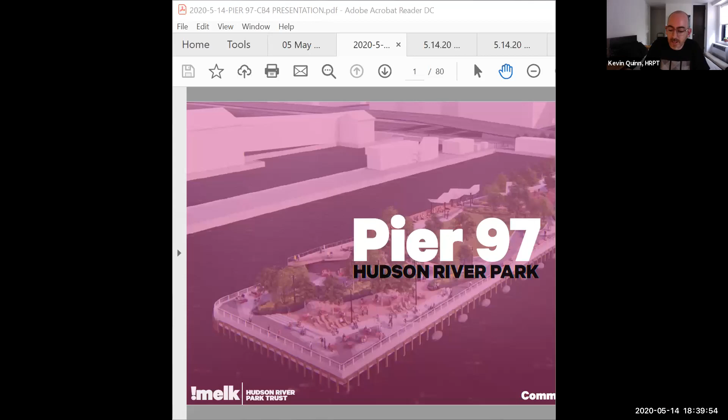When we were last together on this project in November, we presented a schematic level design. Since then, we've been to the Public Design Commission, who received it positively but gave us some minor comments that made the project a little better. We've added Toshiko Mori Architects to the team to develop the building component, and we've also got new information regarding the historic ship location. So we'll begin by having Melk, our design prime, go over the changes we've made to the landscape area in response to the Public Design Commission comments. Ian, if you could start your bit.

Hello everyone, nice to see you all again. Hope everyone is well. Last time we met with you was back in November, and today we're going to do a brief recap of the project for the benefit of some of you.

Just to give some context again of where this project is, this is more for the benefit of the public tuning in now. This project is in the northernmost extent of the Hudson River Park, nestled between Clinton Cove and the southern side of Riverside Park South, pretty much in alignment with West 57th Street.

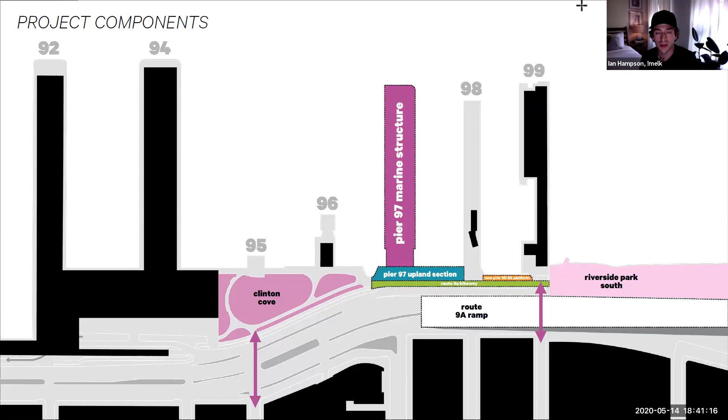It's also proximate to Central Park, a 15 minute walk uphill, and it's near other community amenities such as DeWitt Clinton Park, Gertrude Ederle Recreation Center, and Lincoln Center.

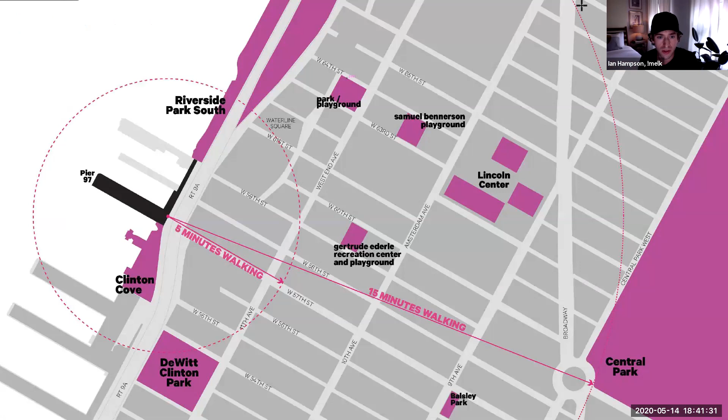This is the running tally of the public engagement we've done with the community to date. May 14th is today, so we've had a good amount of time spent with the community, and we feel like we know all of you well. So far everybody's received this project with open arms, and we're thrilled about that.

Just to give a recap of the schematic design that you saw last time when we were together in November.

This was, and still is, the most recent design scheme. You can see Pier 97 highlighted at the bottom, Piers 98 and 99 to the north. The actual project boundary includes the frontages in front of Pier 98 and 99 - Pier 98 being Con Edison and Pier 99 being DSNY, the Department of Sanitation. We're doing improvements along that corridor as well.

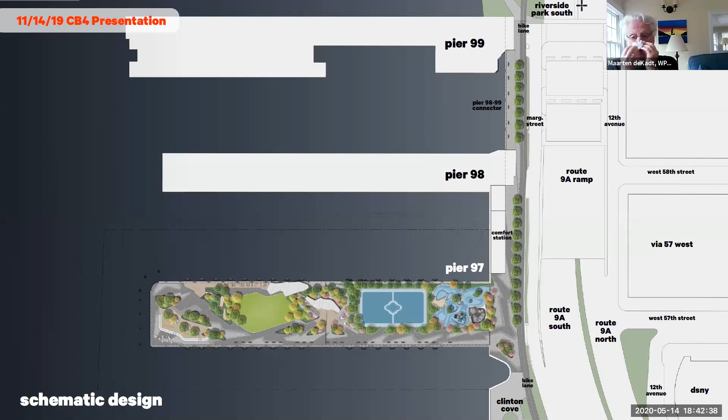Zooming in here, going from east to west - which on this picture means right to left - we have an entry plaza, a playscape for children, an activity field sized for U7 activities, a flexible gathering area, sun lawn, sunset deck, a belvedere, and an overlook. Programmatically, the park is designed to have all the sports and activity program justified to the east, with more of the park and immersive program to the west.

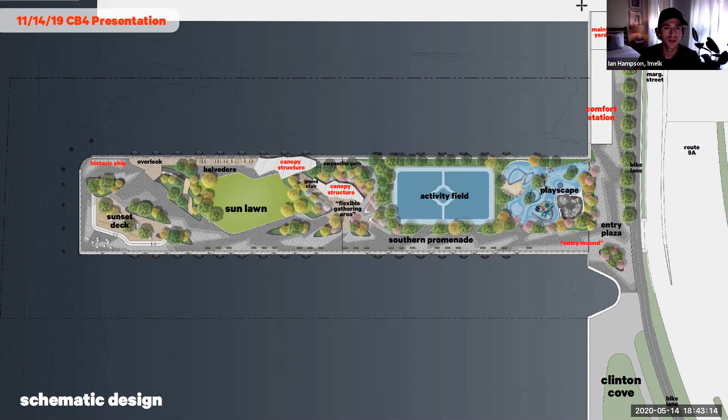This is a bird's eye view looking towards the northeast from the Hudson River, where you can see all the topographic manipulation we've introduced in the design.

This is showing the entry to the children's playscape from the upland. If you're walking south from Pier 98 towards the entrance of Pier 97, this will be one of the possible entrances you could take, if you have children for instance.

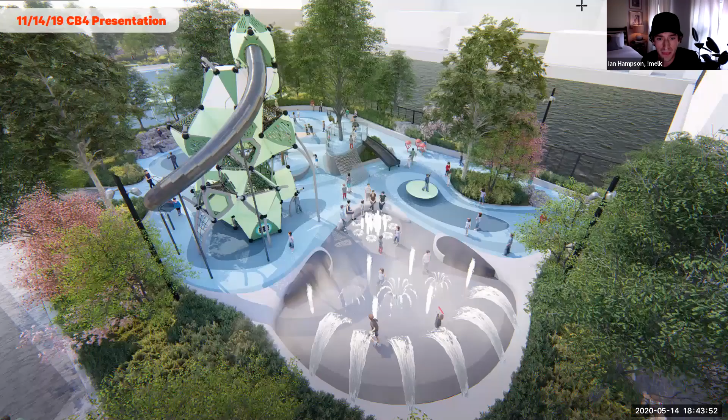This is a bird's eye view of that playscape, showing in the foreground a splash pad and water feature for children - young children, toddlers, and older children.

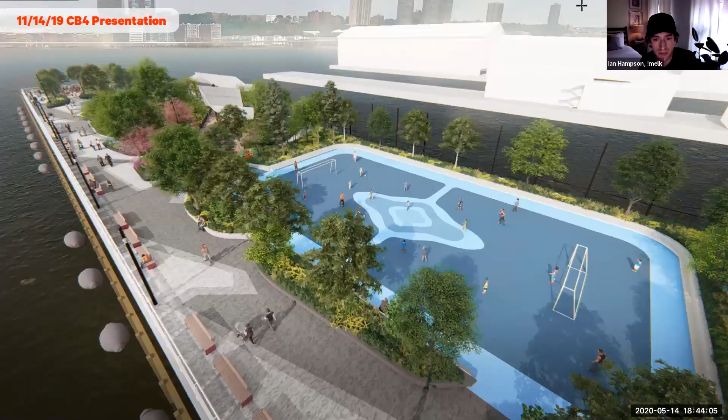This is another bird's eye view as we start to walk west, showing the activity field sized for U7.

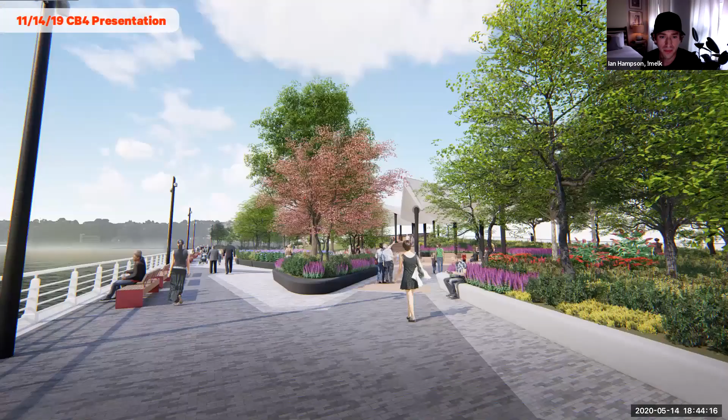Ian, can I interrupt you for one second on that? Is that color scheme what you're going to be using - is it going to be a blue field? Blue field, yes. Thank you.

Some of you may remember, this is what we presented last time as the choice we offer the public - whether you decide to go directly west towards the end of the pier, or go right and find yourself in a more immersive botanical zone that's shady, with lots of visual interest and places to sit and read in quiet.

If you move into that more secluded zone, we call this the flexible gathering space. You'll see the canopy structures we introduced last time. You're able to either continue your journey to the left, or go walk up the stairs to the Belvedere.

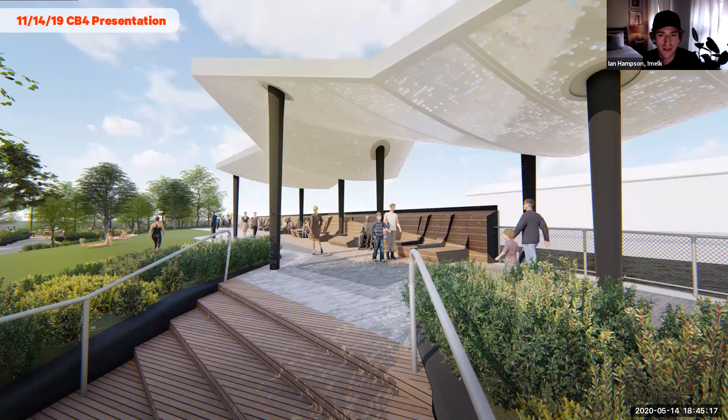This is showing one way to get up to the Belvedere - a seating area that's about 7 feet higher than the base of the stairs.

You're also able to get up to that Belvedere through a sloped walkway that goes around the back side of the flexible gathering space, and that takes you to the exact same location. So we have an intentional convergence of circulation at the top of the stair and at the top of the sloped walkway.

What you have is either a sun lawn to choose from to lay in, to relax in, or you could sit and read and sunbathe on the lounge chairs that we have designed along the northern edge there, suitable for tandem seating and groups and children and whatnot.

And then if you continue walking down towards the west, we have the overlook. The overlook is another elevated area that's about 11 feet higher than the surface down below, and this gives you a beautiful panoramic view of the Hudson River to the north, west, and south.

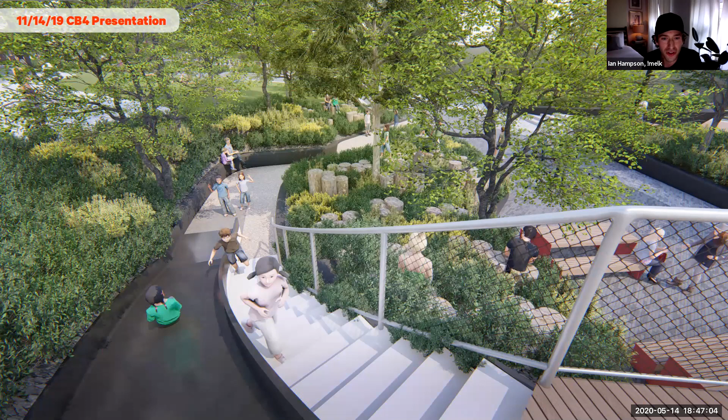If you recall, we designed an adult slide, which we imagine is going to be quite popular for children and grown-ups alike. This shows you how you could get down quickly from that 11-foot overlook down to the lower portion of the park inside this wooded zone, and you're able to come back up to the top through these stairs here if you'd like.

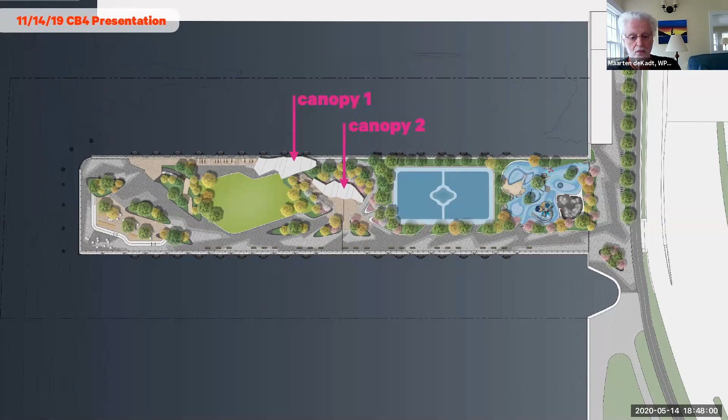So, canopy designs. Part of the reason why we're back with you today is because we've had to make an adjustment to our canopies. As we mentioned before, we were still under PDC review last time. We've since been to PDC, and they've given us some of their comments for the canopies.

And as you recall, we were showing last time a canopy design that was basically kind of an undulating, faceted form.

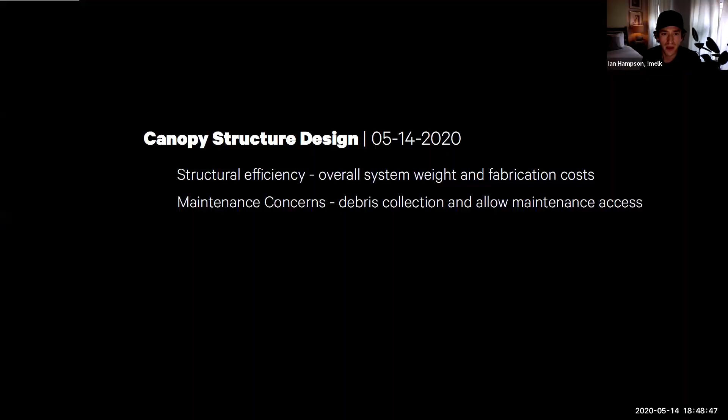Essentially what PDC came back to us with comments was really about the structure and about maintenance, so we took those considerations to heart. We developed a new structural system based on a tetrapod. This tetrapod is much more efficient.

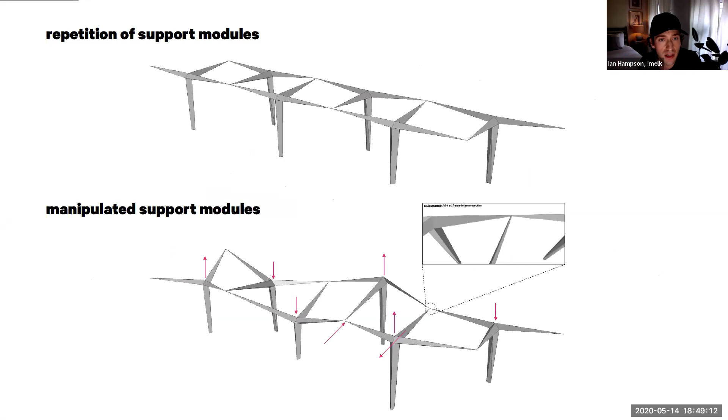What it allows us to do is, depending on what's necessary for the particular condition, whether that be creation of height or manipulation of shade, we're able to manipulate these tetrapods in order to efficiently create the desired effect. Here you can see on the top the structural supports, the tetrapods, and on the bottom, the same with the canopy on top, the skin, the perforated roof, if you'd like to think of it like that.

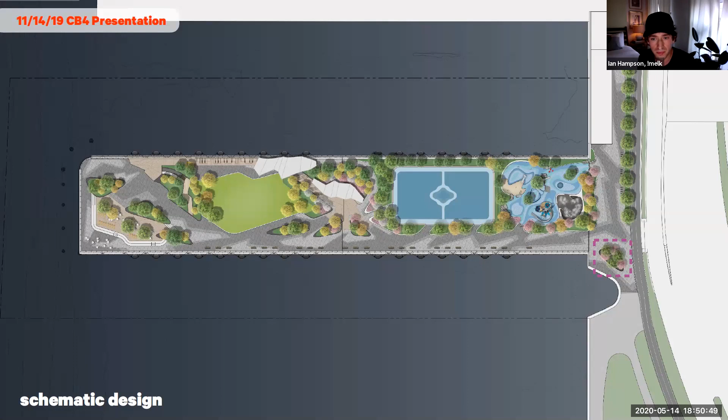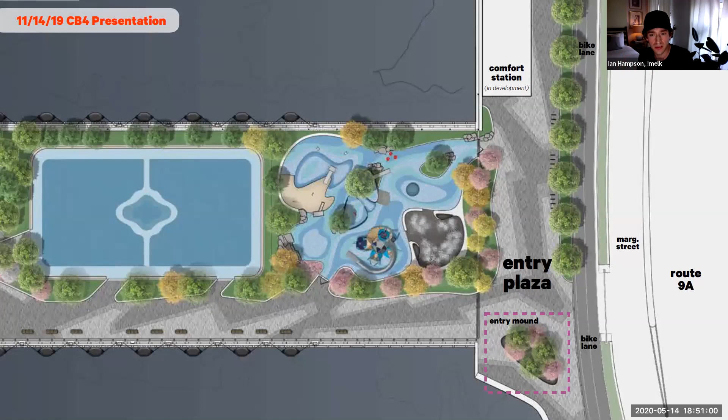If you recall, we had an idea for a sculptural entry mound that was planted. Colloquially, we called it the tree vase, and you can see why we called it the tree vase.

This was intended to anchor and be an identifiable marker as you enter the project. This also went under PDC review. They had some comments to us, and we've made some revisions.

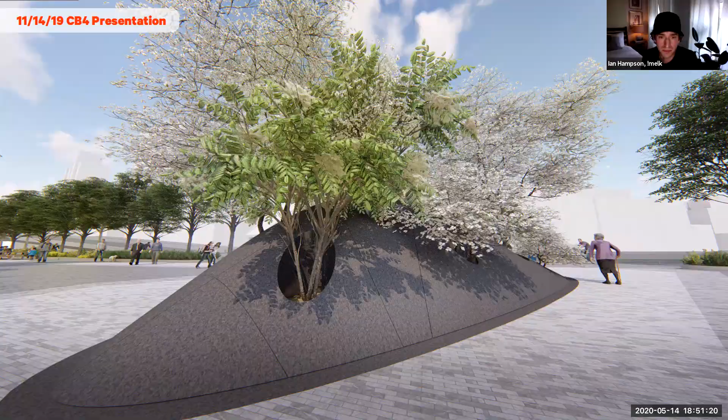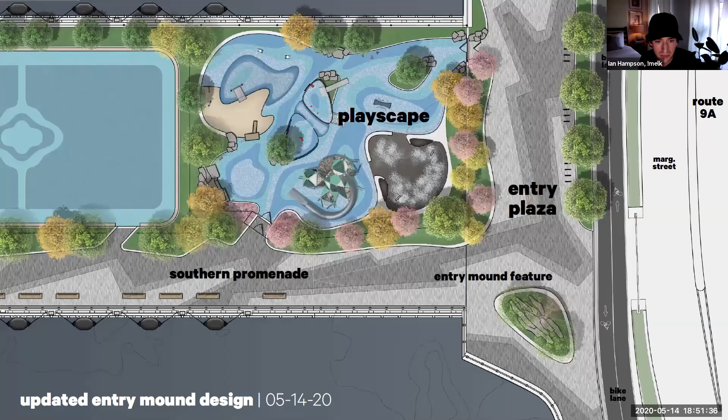Primarily related to maintenance. So we went back, spoke with HRPT, and we now have another option that still serves as an anchor, but in a different way. You can see here, this is the new configuration. It's in almost exactly the same location.

The difference now is that rather than having an arced mound, we took the vocabulary of boulders found throughout the playscape and brought them into this element, the entry mound feature. That creates continuity between these two areas, which works quite well.

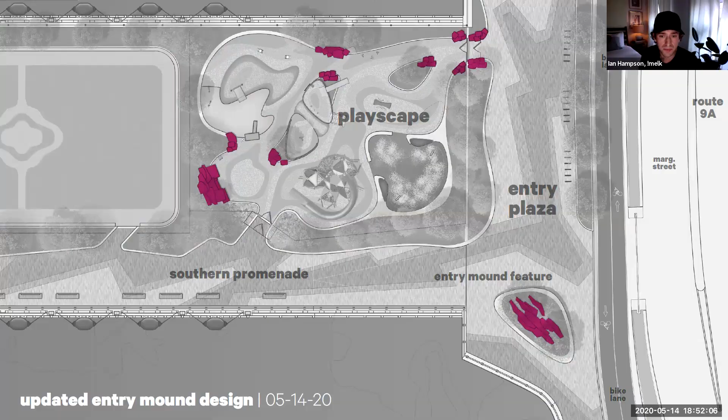In terms of components, we have the sculptural boulders that sit on the inside, surrounded by planting, low shrubs, and overstory trees. And now we even have a seat wall, so it's a place for people to sit upon entry to the park.

You can see here that it still has the same presence at the entry, although a bit different. But nevertheless, it fits within the vocabulary of the park and still suitably serves as an entrance to Pier 97.

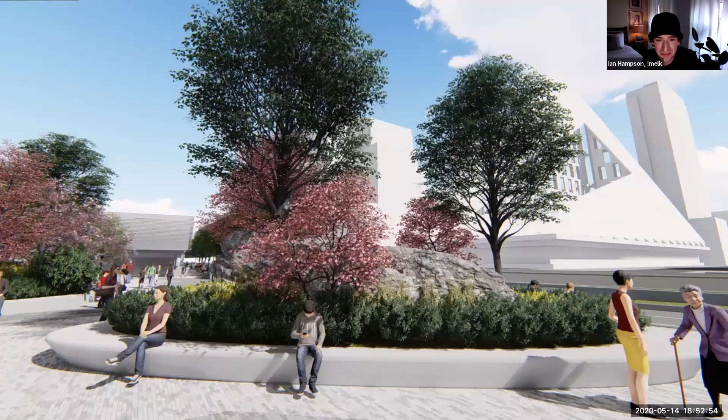Here you can see a little preview of the comfort station that you'll see next. This is looking towards the northwest, with Route 9A in the background and Via 57. And there you have it.

It's Kevin again. I just wanted to say a few words about the building before we introduce Toshiko Mori, the architect for the building. First, a quick reminder of the program: public restrooms, a walk-up concession meaning no interior seating area, a maintenance office and yard, and a utility room for the various pumps, meters, and things needed to drive the pier and the building.

One important thing I wanted the community board to be aware of is that we analyzed every square foot of this building to make sure it was really needed. For us, the open space in the park comes first, so we really struggled to make this as efficient a plan as possible. I wanted to be sure you knew that we did that.

I also wanted to let you know there are real challenges with this piece of the project. It's not an easy task to put a building here. Number one, it's in a floodplain. Number two, we want as much pedestrian flow in front of the building on the esplanade, so we have a pretty narrow, long building. And the uses of the building, like the bathroom and utility space, don't lend themselves to a lot of windows—it could be a pretty opaque building. So we were concerned about ending up with a heavy, opaque building between all the windowless rooms and the floodproofing.

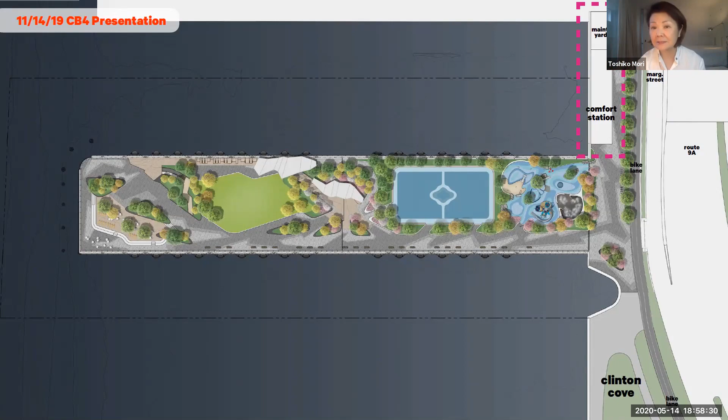The building programs include public restrooms, a walk-up cafe, a plumbing room for park infrastructure, a comfort station, a maintenance shop, a service backyard, and a field office. So it is a utilitarian building, and our challenge is to make it elegant and attractive while being incredibly functional and robust, as it's a building on a floodplain.

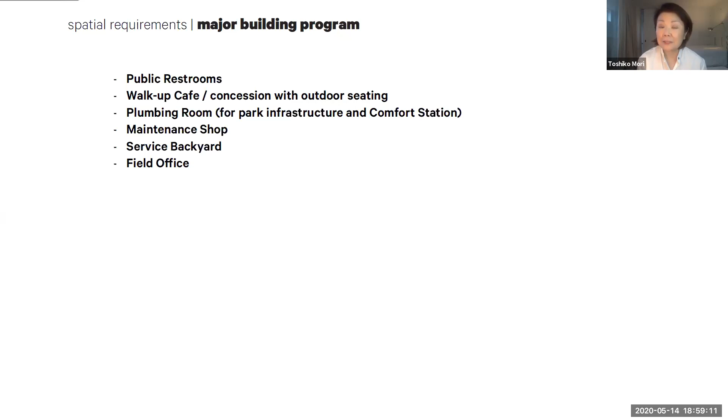David Jobart from our office, associated with our office, is the project architect. He will take you through the building in detail to show how we plan to achieve this effect.

Hi everyone, I'm David with Toshiko's office, as she mentioned. After the overview from Toshiko, I'll take us through the details of the comfort station for the next group of slides.

The facade will be wrapped with aluminum panels that have a very matte, reflective quality, allowing it to pick up different lighting conditions. As Toshiko mentioned, on a cloudy day it might be more subtle, and on a sunny day it can pick up different lighting qualities. The reflectivity is matte, so we don't anticipate any overly bright reflections.

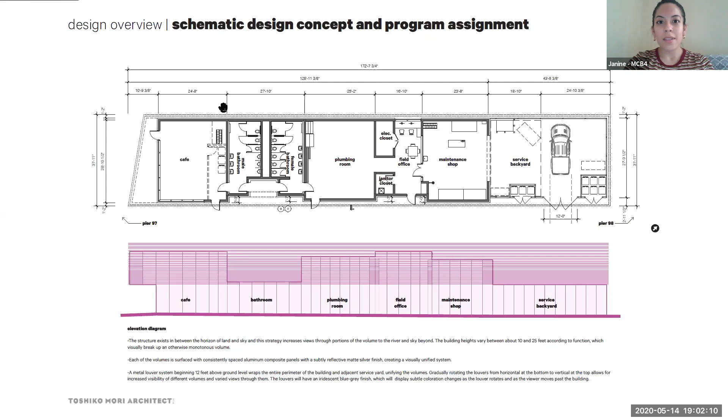If we can go to the next slide. I'm sorry, one moment. Now we're all staring at you, Janine. I know, I'm sorry, this thing froze a little bit. Give me one moment. Okay, can we see it?

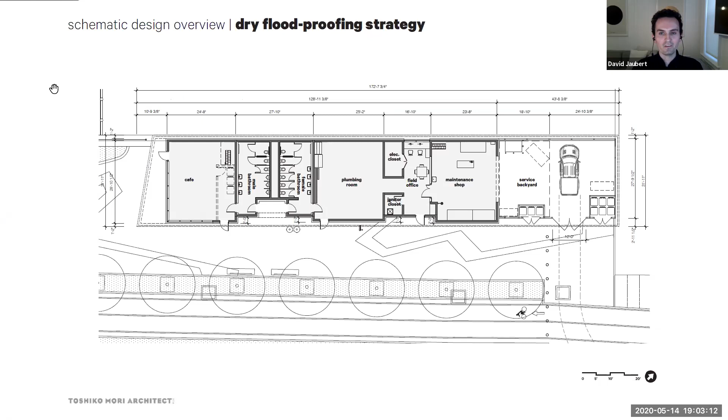Great, that's perfect. To change gears from the design overview and jump into the details—one of the more unique aspects of the project is that it's in a flood zone very close to the edge of Manhattan, on the edge in fact. As a result, the building needs to be dry flood-proofed. That's a flood-proofing strategy, meaning we keep all the water out of the building.

The way we're achieving that are these individual flood barriers, shown in green here, installed in front of each of the openings of the building - doors and windows. In order to get out of the building in the event of a flood, there's also a temporary stair stored in the building that you can use to walk over and down one of the flood barriers. They're fairly high to account for the flood elevation, which is 6 feet. That's a unique aspect of the project, and they're intended to be deployed fairly quickly when a flood is anticipated or comes on.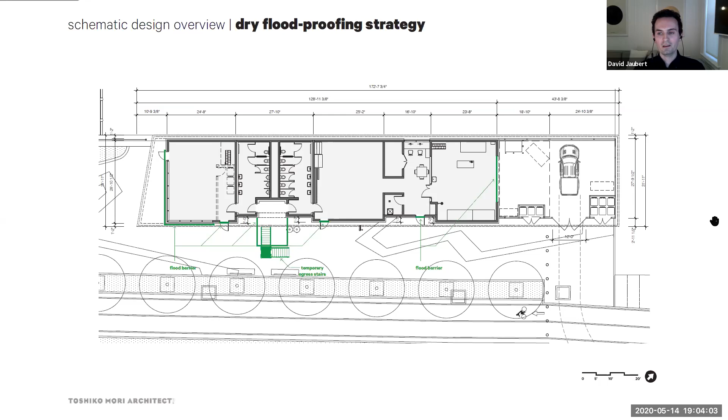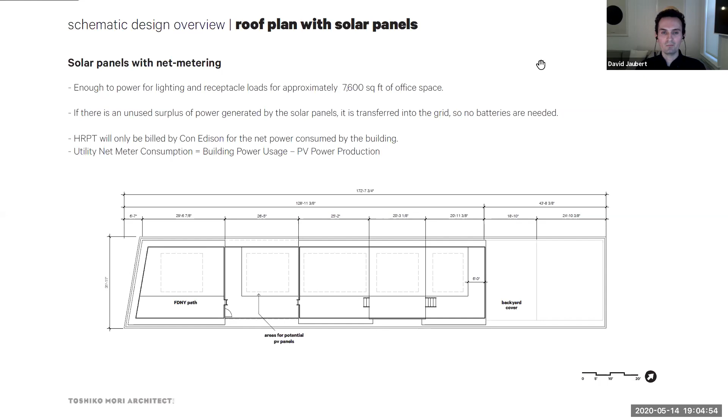One of the other aspects of the project that we're very happy about is the inclusion of solar panels installed in a net metering configuration. The panels are configured to power lighting and receptacle loads for approximately a 7,600 square foot office space. If the panels provide more power than is used, that power is funneled back to Con Ed, into the grid, and no batteries or additional equipment are needed. So HRPT is only billed by Con Ed for the net power - building usage minus PV power production.

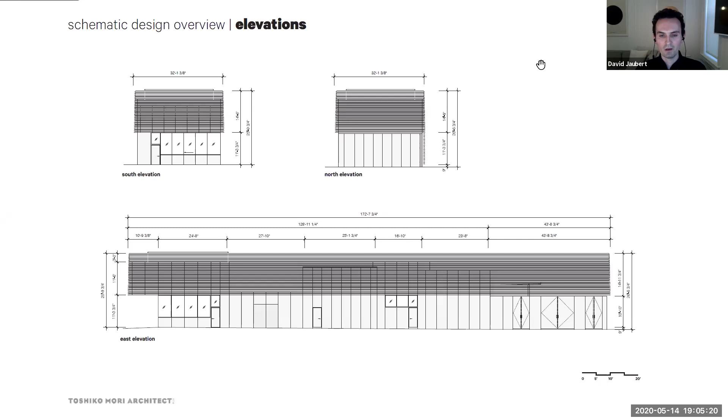Next slide, please. This is just a brief overview of the elevations of the building. The south elevation, top left, looks at a cafe on the south side of the building. The north elevation, just to the right, looks at the edge of the service yard. And the primary east elevation is what most people will see from the city, the promenade, and the drive there.

Here's a little detail about the facade panels themselves. It's an aluminum clad material - essentially aluminum composite with aluminum on two sides and a composite insulating material on the inside. It's very durable and sturdy. The panel widths are flexible, so we're able to design them in a way that wraps consistently across the different volumes of the project.

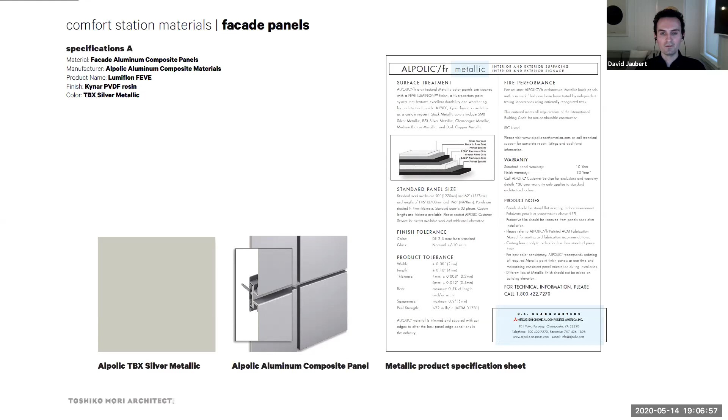Next slide, please. These are a couple of different angles looking at the materials for the aluminum composite. Similar to what Toshiko was speaking about with the building changing its appearance depending on point of view and time of day, the angle you're looking at the aluminum, due to its very metallic reflective quality, allows the building to take on some of the color of the environment as well as your point of view. Next slide, please.

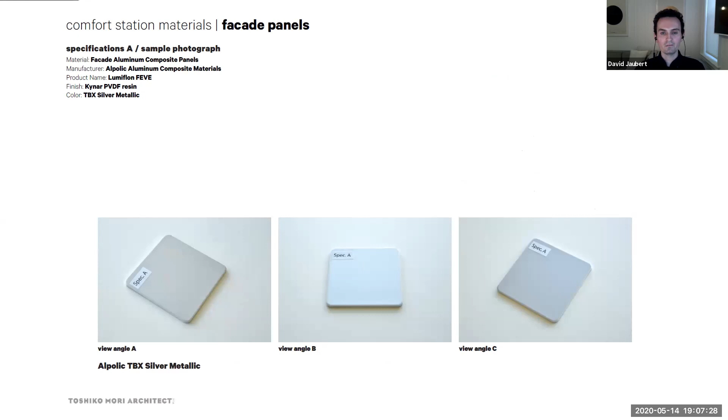This is a rough mock-up from the louver manufacturer showing a typical configuration of how they're applied to the building envelope and their rotational effects. These are all unfinished, but just looking for the basic geometric qualities. On the left, we also have a brief swatch of the iridescent color, which I think we can look at in a little more detail next. Next slide, please.

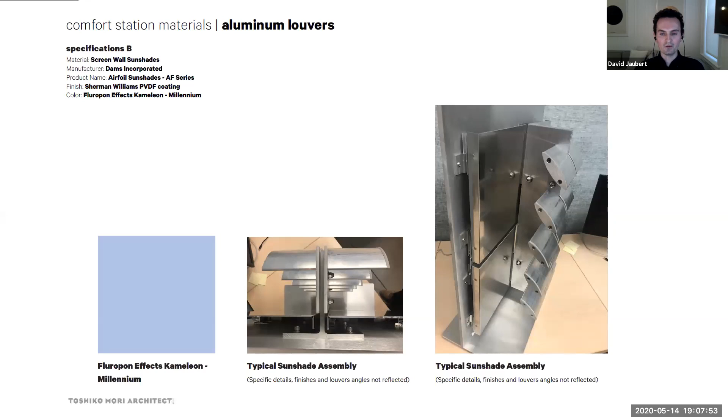Here are a couple of photographs of the iridescent material. Depending on your point of view, the material can look a little gray when you rotate it, which also happens inherently due to the rotation of the louvers and their curved surfaces. You get a very different color depending on your point of view. I think we also have a video we can pull up to show the changing effect of this iridescent material. Yeah, maybe one second.

I think the idea is to have - it has a blue tint to it, but it also has a gray, and then has a little bit of mauve. So it really works with the coloration of a sky.

It doesn't want to load on Zoom for some reason. Maybe we have to verbally explain it.

One of the reasons is the louvers are more frontal and open, so you can see into the building. They close down at an angle, which actually allows you to see through into the sky, so the color of the louvers and the color of the sky can blend at that point. The way it turns creates the illusion that you're really looking up, not frontally. We hope the louver will somehow blend into the sky and somewhat disappear, giving a very soft horizontal edge on top of the building.

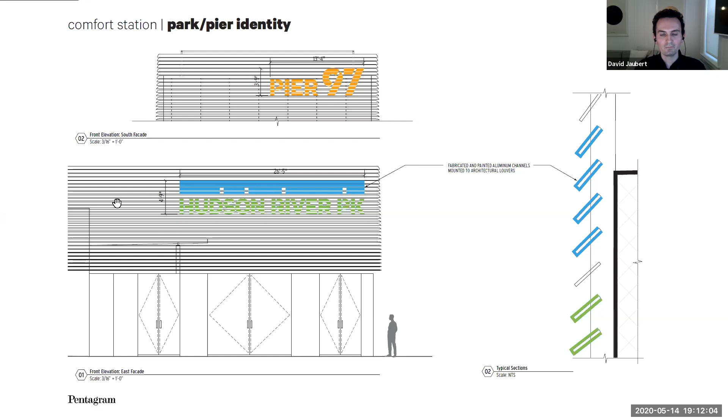Here we also have signage for the cafe itself. This will be determined by the tenant who ultimately comes on board to operate the cafe. There'll be signage on the glass on both the south and east facade of the building at the corner of the cafe.

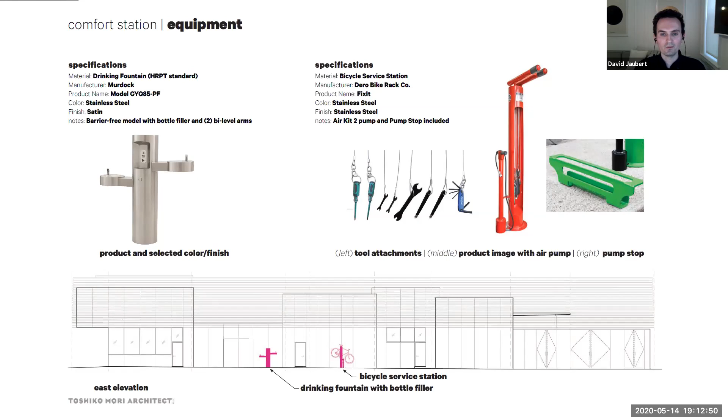Here we also have a couple of amenities that the building provides. One is a standard drinking fountain that also has a bottle filler for cyclists and joggers along the path. In addition, we have a bicycle service station, comprised of a rack for bicycles, an air filling station, and various tools for people to perform basic maintenance on their bicycles as needed.

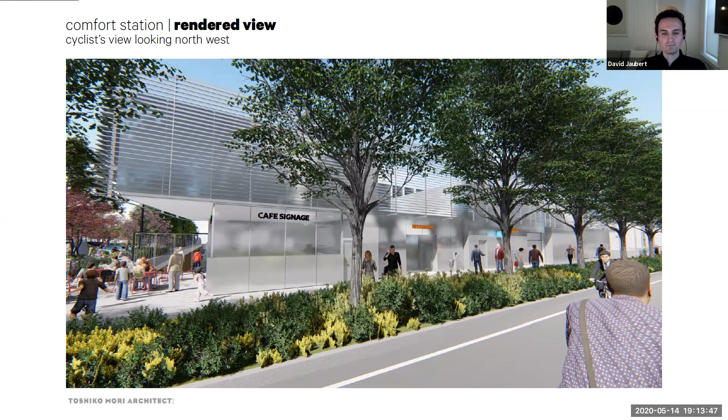Here we're next to the building, looking south. You can see some of the material qualities of the building, as well as the entrance to the restroom and the bicycle maintenance station and water fountain, with the jogging path and bicycle path to the left.

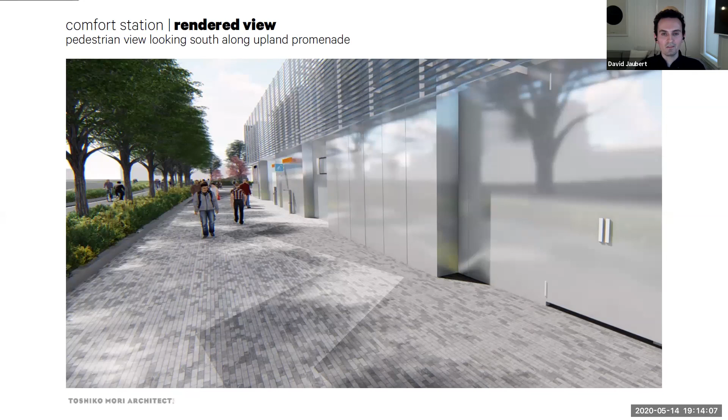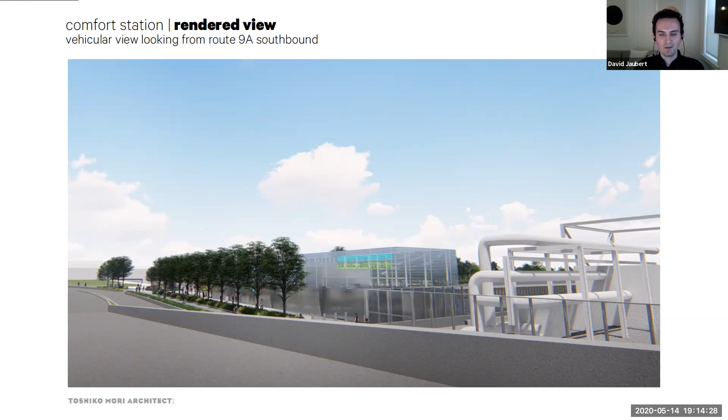This is a view from the highway as we drive south, seeing Pier 97 for the first time with the signage of Hudson River Park, again acting as a beacon not only for our building and the pier, but also for the overall park system. This is what viewers would see as they're driving down the highway.

So that's the last slide for the comfort station. I think we can proceed with the historic vessel section of the presentation.

When we last presented in November, we had the idea that the historic vessel would be located on the northwest corner of the pier. Can you open up the next slide, please?

As time has gone on and we've looked at things, we actually think a better location is on the south side at the east end, because the view is much better, number one. And number two, the activity of the Con Ed barges going in and out creates some water disturbance with the wakes, and puts our historic vessel in a pretty vulnerable spot. It's not a good parking spot for your historic vessel. So we're thinking—could you go to the next slide, please?

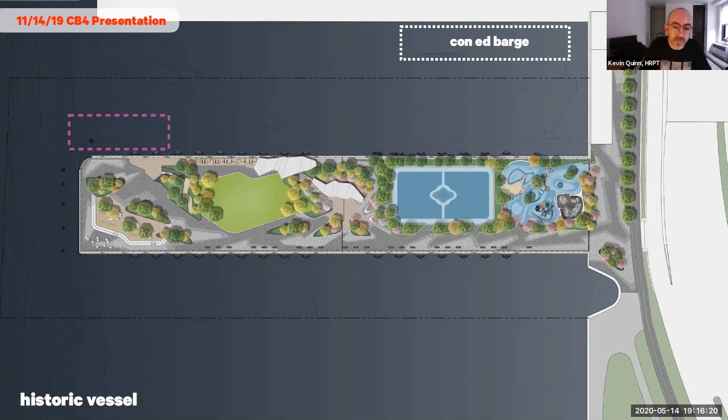We're locating it basically across from the synthetic turf field, about 115 feet away from the bulkhead. We don't know what ship is going here, so I'm going to turn it over to Rashi, who is managing the RFEI process for finding a historic ship for this location.

Good evening, everyone. Here's an update on the RFEI. The Trust had issued a request for expressions of interest for historic vessels in late 2019, offering a total of 4 berths for long-term historic vessel docking: 2 at Pier 25, 1 at Pier 26, and 1 at Pier 97.

The Pier 25 berths have already been awarded, but we are still in the open procurement process for Piers 26 and 97. The uses proposed in the RFEI responses generally range from museum excursions to environmental and educational programs, depending on the pier location. Additionally, a food and beverage concession is permitted at Pier 97.

So the selected vessel is required to also do free educational and cultural programming. It's likely that the vessel that comes in at Pier 97 has a concession similar to Grand Banks at Pier 25 in the park.

But given the shallow water depth and the DEC permit standards, finding the right vessel has been challenging for Pier 97. So where we are now is that we have one vessel that might be able to come in, but we are still in the due diligence process with them. Thanks.

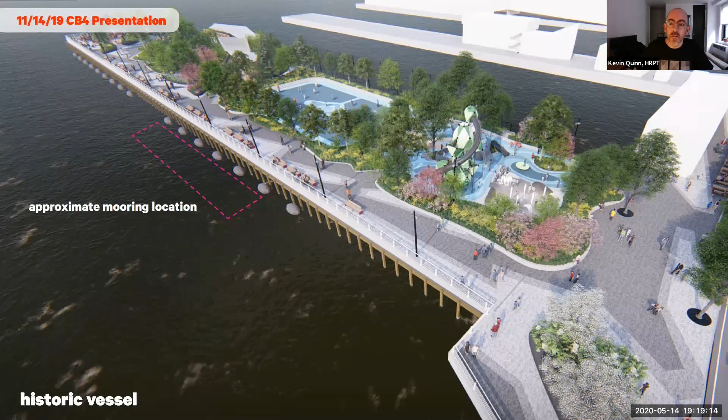Heat-wise, does it hold the heat or reflect it? How hot can it get out there in the sun? That's a good question—we've taken that into account.

There's a decent amount of shade in that location. When we do material mock-ups, we're going to be doing a final test of the material. But our anticipation right now is that it doesn't get too hot as a stone surface, similar to other types of stone surfaces found around the city.

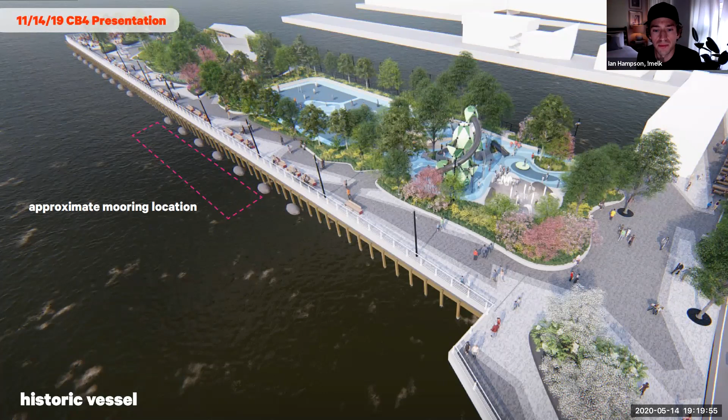This will have a very, very high polish to it, so it'll allow people to slide quite quickly down to the bottom. It's a pretty good sized chunk of material too—it would take a lot of heat to heat that up.

Okay, cool. Well, thank you again. Marvelous job, really was. Thank you, Alan. JD? Yes, I echo Alan's comments. A very thoughtful, well thought out design.

I have one or two questions and a comment or two, and please forgive me if I'm not happy with everything. It's probably just me.

My first question, everything is open to view, it looks like, which is very important, so no activity can go on without being viewed, sort of a safety measure. It looks like you've taken that into consideration, Kevin. Yes, we have. We've walked this through with PEP and our operations people to make sure it's all visible. And there will also be cameras.

That's wonderful. The other thing, the toddlers little area, sometimes the parents like to have that sort of enclosed so the kids can't run out. Is that to be considered or not? I'll give you the general and maybe Ian can give you the specific. In particular, the spray shower area, we worked it so that the little kids are kind of in an enclosed area and the larger kids are more likely to play more in the periphery of it. And there's a cut through for the larger kids who like to run around more. But the spray shower does need to be in one spot for both age groups.

Okay. Then on the children's play area, which is on the northwest end of the playground, it's in a separate little area. It's zoned, but it's not walled off.

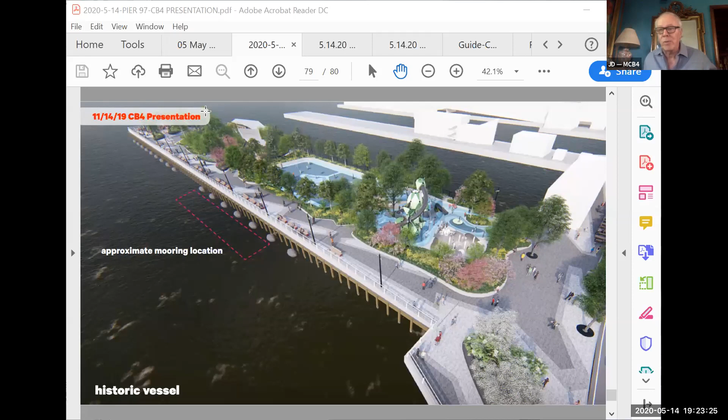Well, I don't like it. I don't want it in Central Park, big sign, Central Park. We know it's there, but anyway, I'll leave that. And no disrespect to the architect and the wonderful, thoughtful design of that building, but it just seems so corporate and so unpark-like. Convince me that it's really not a corporate building that's just all linear.

Is it going to be softened with some plantings or? I can speak to that. And no disrespect, it's a beautiful design, I'm just asking. It's actually a very tough building because the footprint is very minimum. So in a way, your opinion is absolutely right.

So because of the materials, it has a really softening effect. If you think of other metal materials, which are very static and cold, this particular material we chose has a soft, diffusing, reflective quality. So you never see the material, but what you see is what's in front of it - you see people's figures, the trees, and even cars. It has this much softer effect, although it's a very tough material.

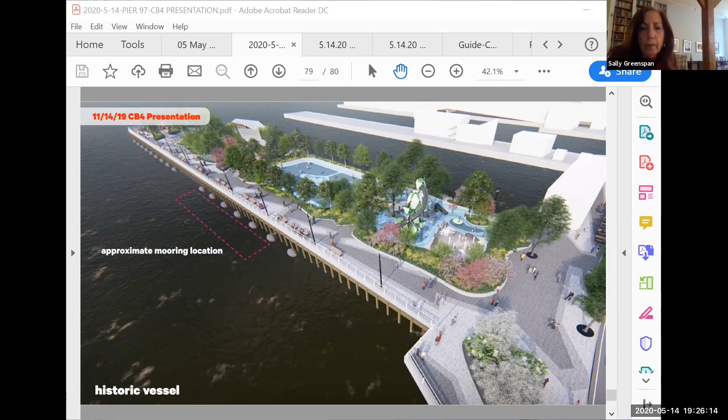I just wanted to ask, I might have missed it in the presentation about the canopies. I remember one of the questions was about the height—were they too tall to protect us from the sun? Another question raised was the density of the trees and the ability to see children from various parts of the park while they were playing; parents had concerns about that. And the slide showing the raised elevated area looked beautiful—is there any seating up there, even for a couple of people, or is it all standing room?

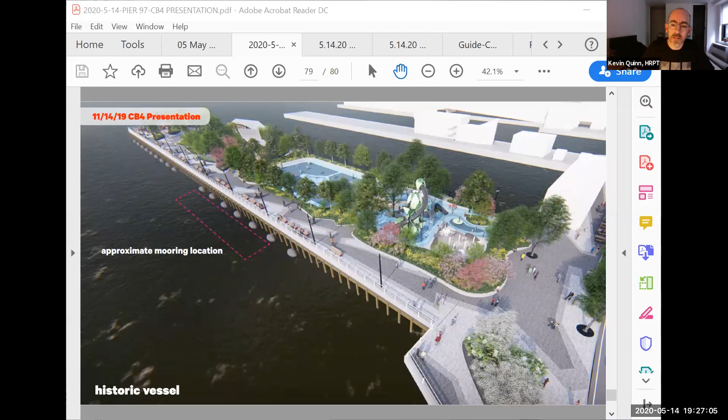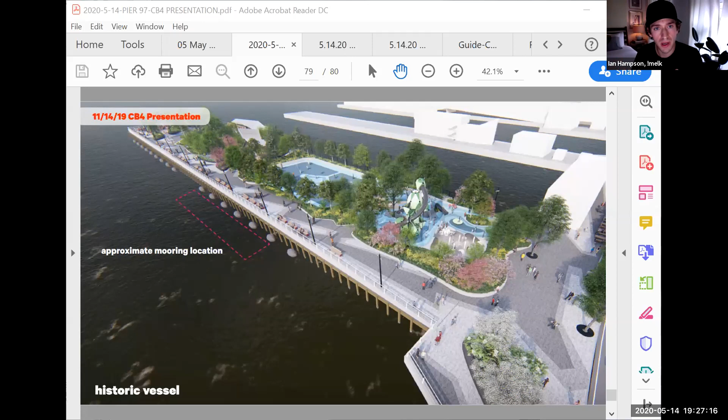The canopy was designed with a solar analysis, a shade study, calibrated based on optimizing the prevalence of shade on the site throughout the year. As for height, the lowest it comes to any point—whether you stand on the bleacher or the upper level—is 9 feet, but on average it's a bit higher. With regard to trees, yes, we kept visibility in mind, so we're avoiding dense conifers and plants that obscure your line of sight from around 3 to 5 feet, which is where most people can perceive a person in the distance, so you're able to survey your route as you travel across the pier.

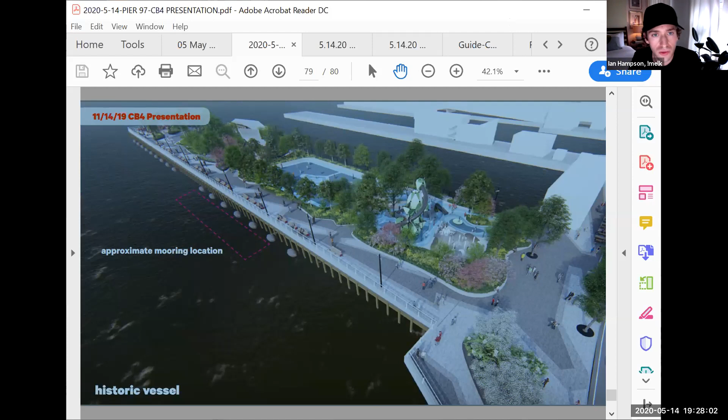For the area you're referring to with seating, the Belvedere, we do have integrated built-in benches of various configurations at various angles up in that location. At the far end, what we're calling the overlook, which gives the view over the far west side of the pier onto the Hudson River, there currently are no seats. That doesn't mean we couldn't put a movable table and chair if HRPT decided, but at the moment it's intended to be an open area with free circulation, considering the slide also connects to that location. It's not a bad idea though.

When I looked at it, it's very lovely, but it's also narrow, so having chairs at that point might be difficult—it could slow down traffic for people wanting to come down to the end. But it's such a lovely spot that people will also want to linger, so there's good and bad about having seating right there. But it could be a place for the weary parent to sit while the kid goes up and down on the slide, or as the parent wants to join them, since adults can ride the slide too. I think you're right that we need to look at the narrowness.

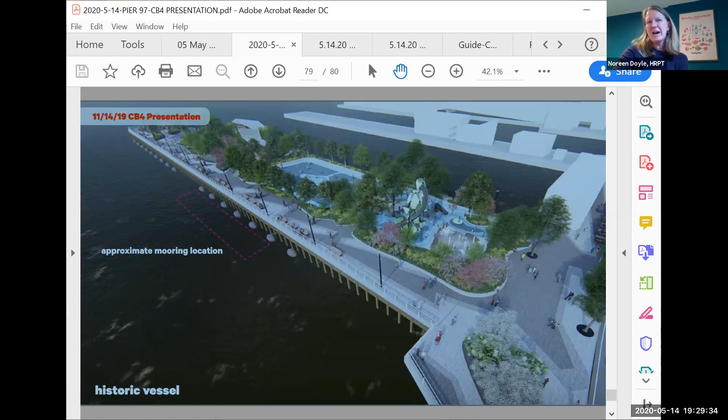It's such a prime spot, it's very easy to imagine someone taking that spot and wanting to stay all day long, like people do on the High Line. Did think of that, right—so I think we should look at both. Thank you, thank you Sally.

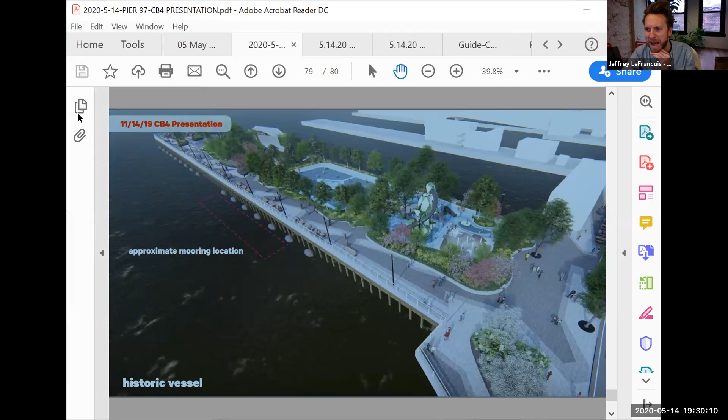David, this is an 80 slide presentation. Do we know how far back that was? Probably in the 20s. Okay. Thanks, Ian. Yeah, okay.

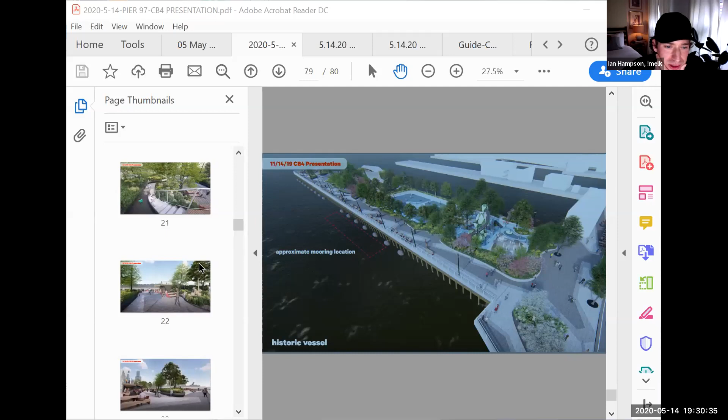Keep going, keep going. David, let me know if I'm passing. I'll let you know the number when I see it. Okay, 20s... it's probably slide 20 actually, or 19. Is this what you mean, 18, 19?

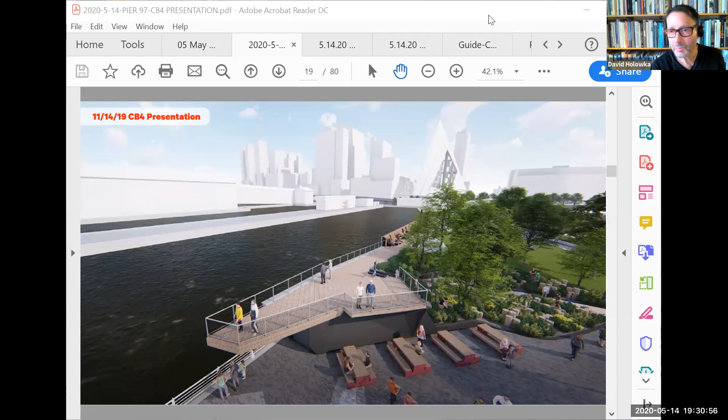The part under the deck, can you tell us about the material there? It feels a little bit like a blank space that might be an opportunity. What can you say about it at this point? Sure, it's a cantilever, of course.

Beneath the deck, that volume, that's a black stucco in our design, a faceted black stucco, is a storage closet for HRPT. What you can't see in this view is a door that allows O&M staff to access that for rakes, brooms, and carts. Also, our environmental programming staff would dearly love a spot where they don't have to carry their fishing rods, pop-up tents, and everything else they use for education programs up and down the park.

This furniture is movable, so it's nice to have a kind of wall behind you. If we were to have a class event, we could rearrange the furniture and have that be the backdrop. Okay, if we switch over to the building...

I hear JD's comment that it feels corporate, but I think this is actually a very subtle design. Full disclosure, I'm a big Toshiko Mori fan ever since visiting her elegant visitor center at Frank Lloyd Wright's Darwin Martin House in Buffalo. Toshiko's a very accomplished architect and educator at major design schools in this country, and the wife of Jamie Carpenter, another architect well known for inventive use of materials that exploit light in inventive ways. So I think we're getting a little bit of 2 for 1 in this design.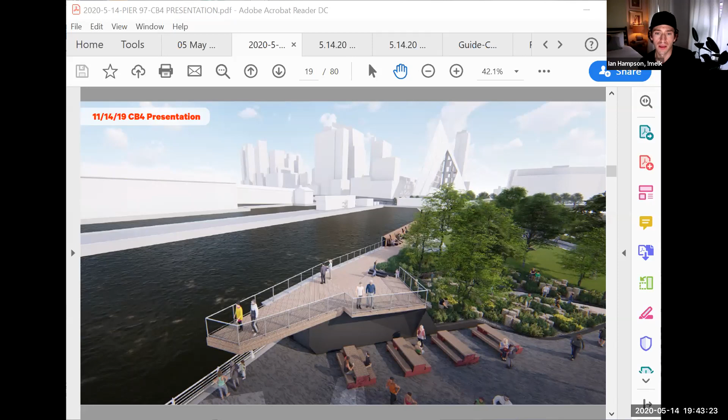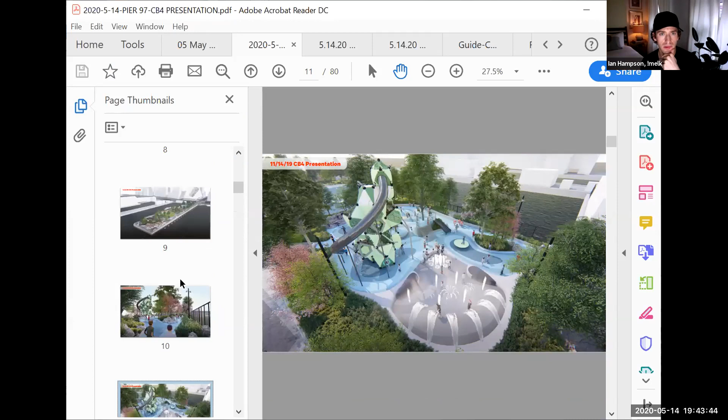Janine, could you go to the site plan? Maybe click back a few slides, please. While they're pulling that up, Lowell, one thing I'll tell you is this slide only accommodates one person, be it a kid or an adult. One issue I have with Chelsea Waterside is it's really wide, so multiple kids go down at the same time, and that creates tumbling. This is a one-kid chute.

All right, because this one looks pretty high. Corey's going to love it. It is pretty high. Scott, what I'm really looking at is the complete flip of this, Ian, where the slide -- not the back of it, but where you get off. Janine, could you go to slide 8? The landing zone, yeah, thank you Noreen, that's the phrase I'm looking for. And if a bunch of kids go on it quickly, Ian, how will they back up on each other?

Yeah, so we designed this with the fall zone criteria and also the manufacturer's criteria. It's a little hard to see on the screen here, and I'm unable to point to it, but we have the slide positioned to the path of least resistance right now, aiming at the most open portion in the southern part of this playscape.

All right, I'd just ask that you look into that and make sure -- meeting the manufacturer's specs is great, it gives an answer when parents start complaining, but if we can exceed the manufacturer's specs, so much the better. On a related issue, I agree -- this shouldn't be another Chelsea Waterside Park where it seems close to a wall. There's plenty of room at the bottom of this slide, it's positioned so that there's plenty of room, and Chelsea Waterside made us very conscious of this in planning this piece of equipment.

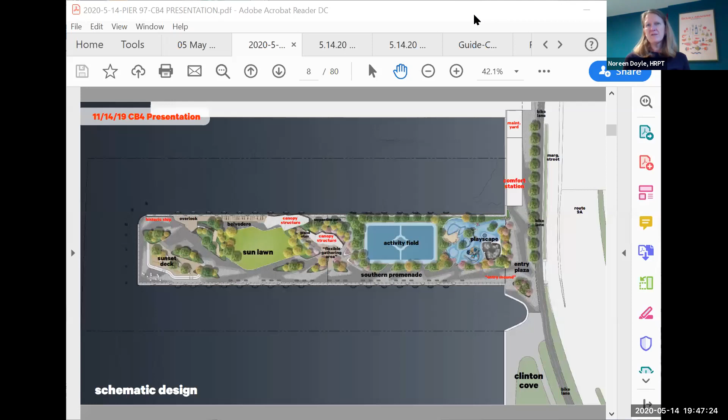So, yep, understand. Can you zoom into the playscape? That might help.

I also wanted to just address the toddler area, which is basically the top left piece of this playground. So it's in a cul-de-sac, and that's where the sand is. That situation has worked really well for us. I've done it in other parks, but also Pier 25 has areas for different ages, and they're not fenced off from one another, but the kids fall into little compartments kind of by themselves. That's what we were shooting for here. When we have fences between the age groups, it ends up cutting the park up into too many pieces.

And I can tell you, my own daughter, the only injury she got in a playground so far is crashing into a fence gate, so I'm a little hesitant to. All right, I understand, Kevin, and the fact that it's the furthest area from the road gives me some level of comfort. There's also that row of trees between the boardwalk and the bike path, right? So there's not an attractive nuisance of running out into the highway.

Right, and maybe I missed your point, but the playground itself is entirely fenced in. There are gates to get into the playground. Okay, that probably solves my problem then. On the overlook, it looks like there's just one way in or out. Are we worried about a bottleneck up there since it is such an attractive site?

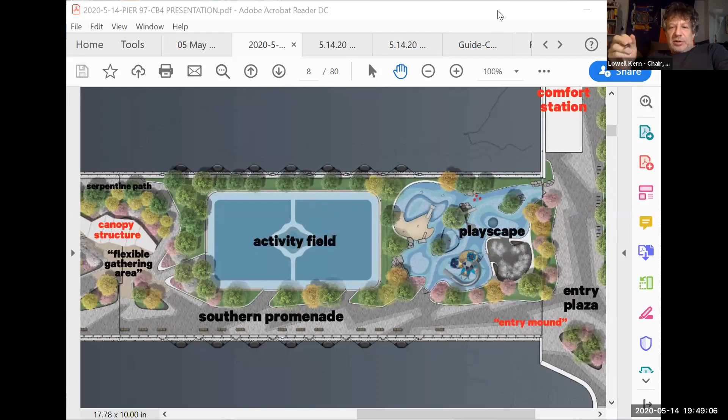Janine, could you go to the left? Just scroll left, Janine, you should be able to see it.

So it looks to me like there's only one way in or out, that's through the Belvedere. Is there another way out of the overlook that's going to help alleviate traffic? There's the stair and the slide. Well, the slide, yeah, but I'm worried about people who get up there and you're gonna realize the slide's the only way out. There's a stair also next to the slide. Yeah, okay.

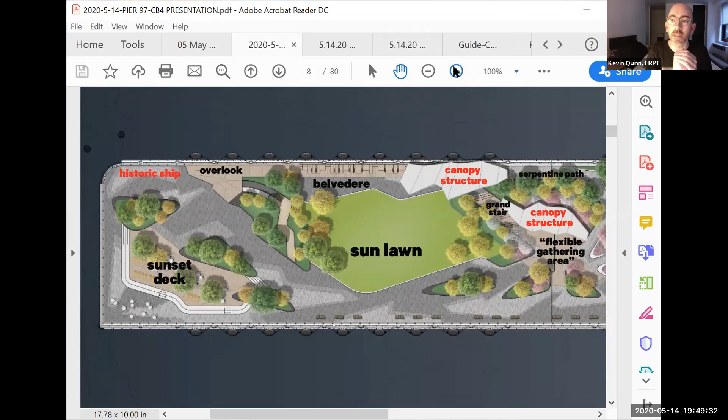Let's go back to the building. The concept is great, I love it. I'm concerned about the louvers either being an attractive nuisance to birds if they can't tell that it's a building, because of the iridescence. I'm worried about it retaining heat and creating an uncomfortable feeling in the restrooms and in the cafe. And the louvers themselves, who's controlling them and where is that controlled from?

Louvers are fixed in the position. So they don't move up and down? No, it's fixed in the position. So the louvers themselves have this kind of airfoil shape, and they will have insulation in them, so it's actually not going to produce heat.

We also dealt with a project in Cambridge with the louvers and the birds, and what we discovered is that birds hate angled louvers. Okay, a slight angle, because they have little feet, so they don't like to perch at an angle. This was with a pharmaceutical company, we did a lot of studies, and I think even a quarter inch, they hate it. So that's actually something we have worked with.

Birds are attracted to something which emits light or is transparent, but this still has a slight iridescence, it's not reflective, so they would know not to go in there. I was worried about them perching on the western side near the water, but I was more worried about them flying into the back of the building. But if the iridescence isn't reflective, that should help.

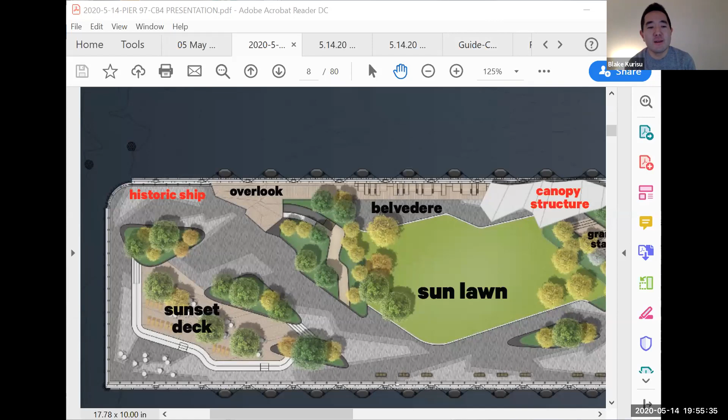Yes, thank you, Lowell. Blake? Yes, thank you for the presentation, I'm really excited about this. Two quick questions - one, and I might have missed this at the last meeting, but it looks like there's a different fencing on the north and south side of the pier.

I understand the need for a more chain link kind of fence in the activity area where balls might get thrown into the water. But I'm wondering about the rationale of continuing with that chain link look all the way to the west side of the pier. My second question is about the building - it looked in one of the pictures like there was a vehicle in there. I want to learn more about the interaction between the vehicle entrance and the bike path in that area.

Sure, I could speak to the fence. It's good that you identified that we have quite a significant fence along the north side, done primarily to keep errant balls or frisbees from the activity field from going in the water - same for the children's playscape. The reason we've extended that fence typology farther west was for the efficiency of the detailing. Because we have a grade change along the north side, along the Belvedere and the Overlook, we have a disconnection from what's currently installed along Pier 97, which is the HRPT standard guardrail. That guardrail is maintained everywhere except the northern portion between the tip of the overlook and the entrance of the activity field. We did that not only for efficiency of the detail, but also for its size - the HRPT standard guardrail is quite heavy and takes up a lot of width dimensionally. So by using a thinner detail, we're able to make more efficient use of the space, and join specific elements together without taking up too much room.

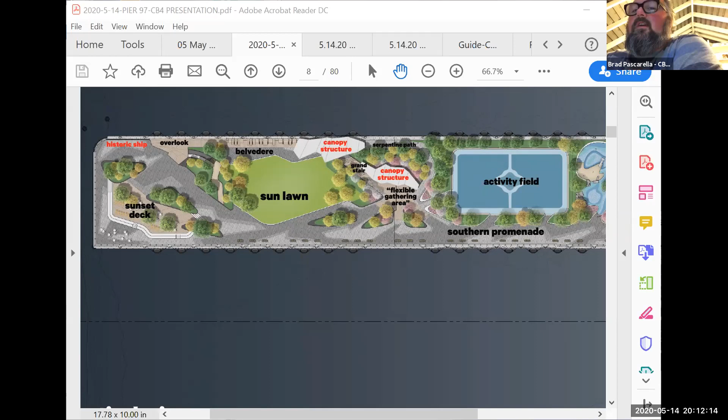And Madeline, thank you so much, we've been waiting for solar and green for years, and we really appreciate it. Thank you. Oh, it's our pleasure, because it's really important. Thank you, Christopher. Thank you, Jeffrey. Thank you, everybody.

I just wanted to say to HRPT, Toshiko, and Imelk, you're really making green space out of nothing, and it's heartening to see the hard work going in during this time that we're all facing right now.

Secondly, two comments about water taxis. I'm aware that Pier 90 was dredged to host the U.S. Naval ship Comfort, and it was done in record timing. I don't know how deep they went, but that's another option for water taxis on the Hudson River Park. That may be something to look into in a future meeting with EDC. I believe they're the ones that manage that pier. That's all, but thank you everybody.

I think the Manhattan Cruise Terminal is different than the piers in the rest of the park. There are DEC and environmental regulations around dredging in these areas, if I'm not mistaken, Madeline, that would require much deeper conversations around an EIS and that type of thing. I'm sure Noreen would like to chime in, but the Comfort got an emergency permit to dredge because it was truly an emergency. Dredging is really complicated and difficult under the best circumstances, meaning the passenger ship terminal, which is not in the park. But in the Hudson River Park Act, it actually says that no dredging is allowed. So that is a big issue.

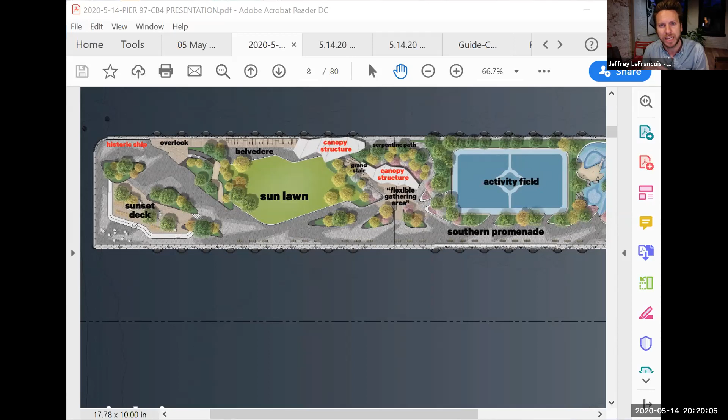I did want to ask about the south side of Pier 96 with regards to your use and access. It's not on your map - 96 does not stick out very far, it's very short. So 94 is our southern boundary and 97 is our northern boundary. That space and the imaginary line connecting the end of those piers is our space for kayaking. It's already difficult to keep people away from those piers - everybody wants to investigate, especially when the concerts were happening on 97. So having other attractions there will be difficult.

We are very busy on the weekends, Saturdays and Sundays from May through October, always busy. So anything moving around within our embayment poses a huge issue. We do environmental education that involves fishing and other activities in the water, and the issues you're addressing here we have at 3 other boathouses in the park as well. We do environmental programming and other things in other places, and we basically work with people to try to figure it out.

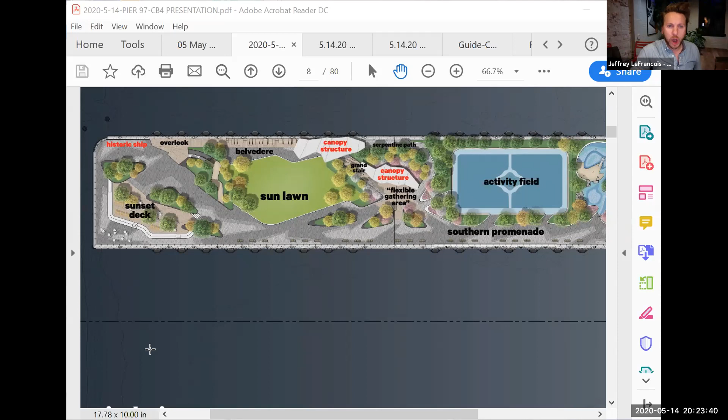Okay, good. Our next item: scope of work for the planned restoration of Private Passage, the sculpture in Clinton Cove, which is actually just south of where we were viewing this evening.

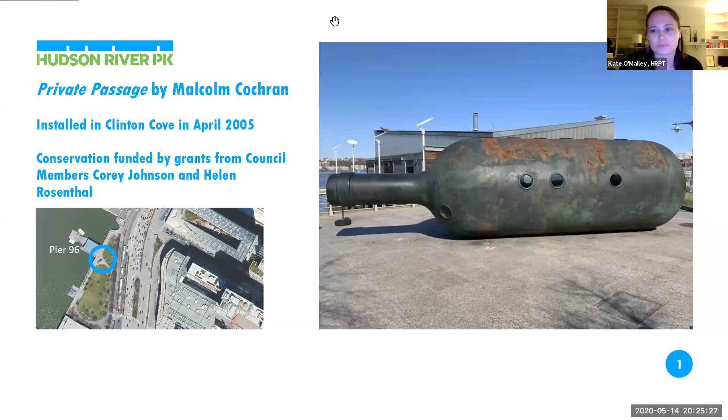So Private Passage is the formal name of the large sculpture that we more commonly refer to as the bottle. It's a piece by Malcolm Cochran located, as Jeffrey mentioned, in Clinton Cove, adjacent to the Pier 96 boathouse. It was installed in April 2005, so it's been in the park for about 15 years now. As you can see from the image on the right, it's starting to show its age a bit. Thanks to grants from council members Corey Johnson and Helen Rosenthal, we've been able to start this project to conserve this sculpture. Next page, please.

So we started this project by hiring Wilson Conservation. They're a well-known art conservator based in Brooklyn. We've been collaborating with them and with Malcolm Cochran, the artist, to develop a set of specific recommendations for how to restore the sculpture.

So the primary scopes of work are the application of a new exterior finish. You can see in the image on the bottom right that the piece is starting to rust. It's been exposed to weather, members of the public interact with the piece, and it also went through Hurricane Sandy, so it's starting to need some work. The sculpture itself is made out of steel, and there was an applied coating that made it resemble aged bronze. For this project, we're going to remove that applied coating, make any repairs necessary to the steel, and then apply a new system that's going to be more resilient and something we can maintain on our own moving forward. So we think that will really be an improvement that will allow this to stand up to time.

While we're at it, we're also going to replace the glazing in all the portholes. Some of them have become scratched, a few have broken over the years. We've replaced them, but we're looking to use more resilient materials. Also on the interior, the piece was flooded during Hurricane Sandy, and while we did the best we could and tried on multiple occasions, you can see in the image on the upper right there's some rusting, some dirt that needs attention. So there's going to be a thorough cleaning. They're going to take care of the rust, and it's going to be returned to us looking brand new. Next slide, please.

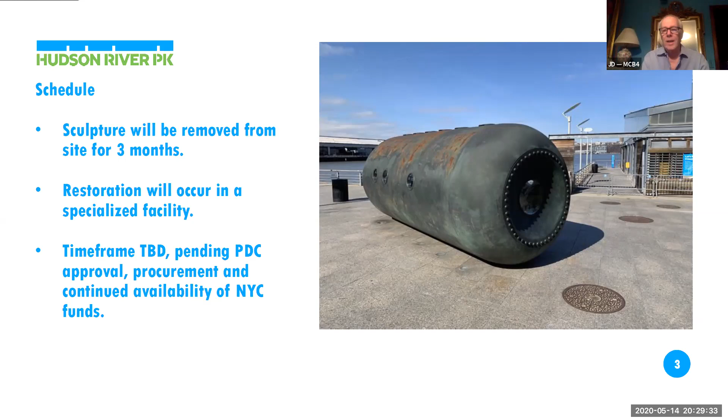Yes, I am. I move that we write a letter thanking Corey and Helen for the funds to restore. Thank you, is there a second on the motion? Thank you, Sally. Seems like a pretty straightforward letter.

Kate, did you receive, was it recent, was this fiscal year? Is this years in the making? Just so I can note. I think that the funding from Corey may have been last year. We can get you that actually. So recent, okay, that'd be great if, just so I can include a specific line. Yeah, we can get you that. Thank you. Okay, great to hear that. We love new public art and improvements to our existing public art, so thank you for that.

Next item on our agenda, moving to City Parks to present on the temporary public art exhibition coming to Bella Abzug Park in the summer of 2020, also referred to as Hudson Boulevard, the area around Hudson Yards. We have a brief presentation on that. Have we moved over the person presenting?

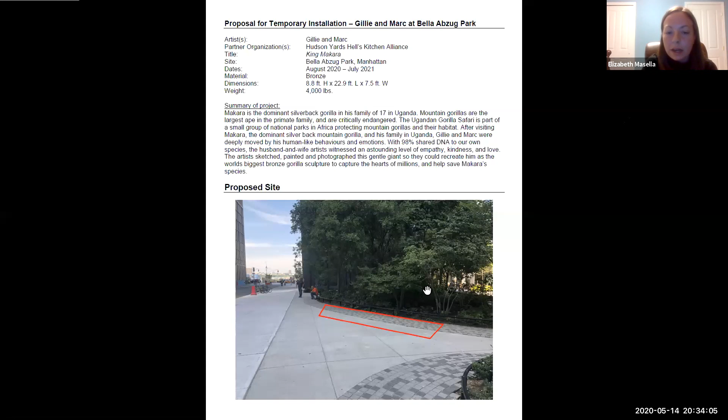So that's essentially it. Tentatively August 2020 to July 2021. I'm happy to answer any questions you might have. Thank you, Elizabeth. Any questions from members of the committee?

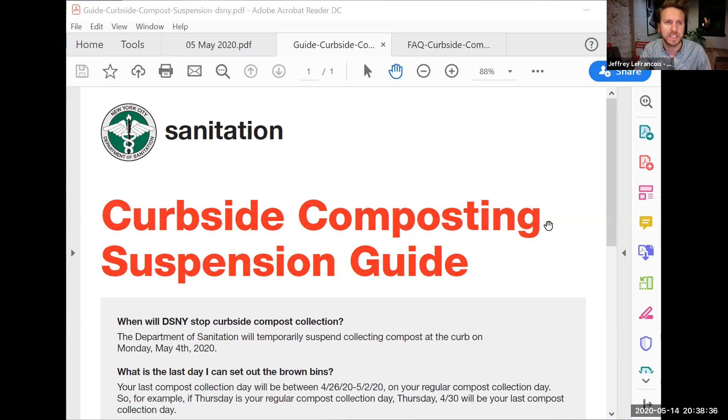On to the next item on our agenda, from the Department of Sanitation regarding the compost collection program suspension. I'm sure they're going to get into this, but the city stopped not just curbside composting in light of the COVID outbreak, but it's also been put on halt at green markets, and Hudson River Park has also suspended their compost collection. So other than local community gardens, or if you have access to the Lower East Side Ecology Center in Manhattan, there's really nowhere to compost. So we asked for a brief update on the why, and what we might be able to do to request getting some of it back online, not curbside pickup, but what locations around the city and in our neighborhood in particular we can request.

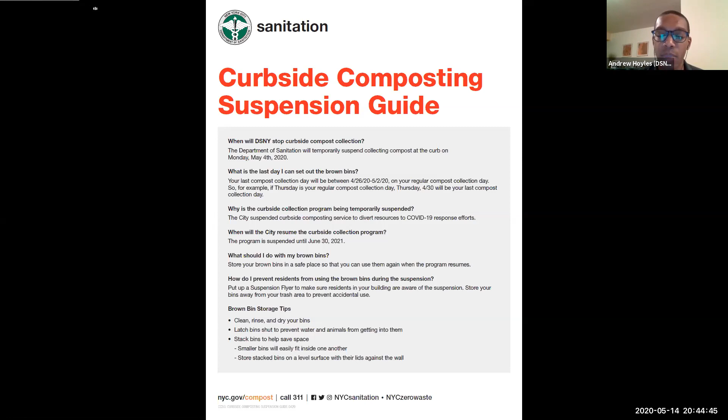Marguerite, I'm going to ask if you have elements you want to add to this. I think I covered all the aspects of the drastic shift. We had the largest program for composting in the world in the beginning of March, and now we actually have quite a small program given the reality of COVID and the response. But I want to see if Marguerite has anything she wants to add.